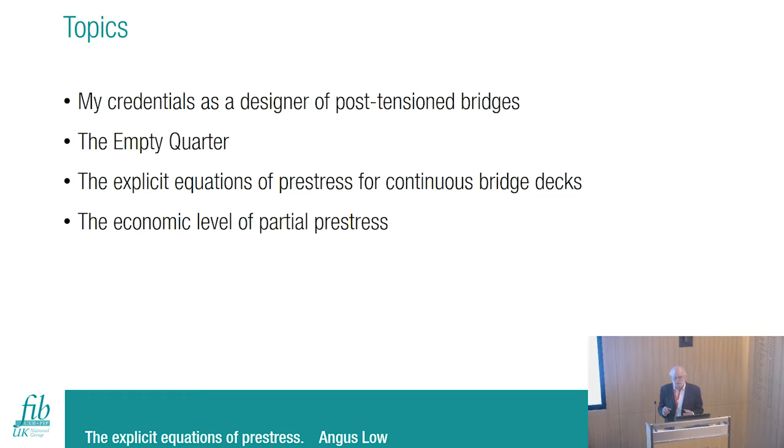The topics I am going to cover: my credentials as a designer of post-tensioned bridges, something I strangely call the empty quarter—an idea which I'll throw at you—and the explicit equations of prestress for continuous bridge decks. This is historic in that I made the intellectual breakthrough about 38 years ago, but it's also right up to date, because I think today is actually the world premiere of it being presented. So that's a world premiere presentation bit of history—try and work out the philosophy of that one. I'd like to get to the economic level of partial prestress, which also comes from an explicit equation, in due course. I think I've got plenty of time.

Do I have to press twice or something, do I?

I said my credentials—I'm a designer, and when it comes to credentials I like to keep my mouth shut. But this bridge is relevant. I joined Arup in 1968. I moved into the bridge group in 1972, when I was sat down next to Robert Benaim, who had recently arrived from the Freyssinet organization in Paris. He was bubbling with everything you can do with prestressing, and it was fantastic working next to Robert Benaim. The first job he gave me was to do the prestressing calculations on this bridge.

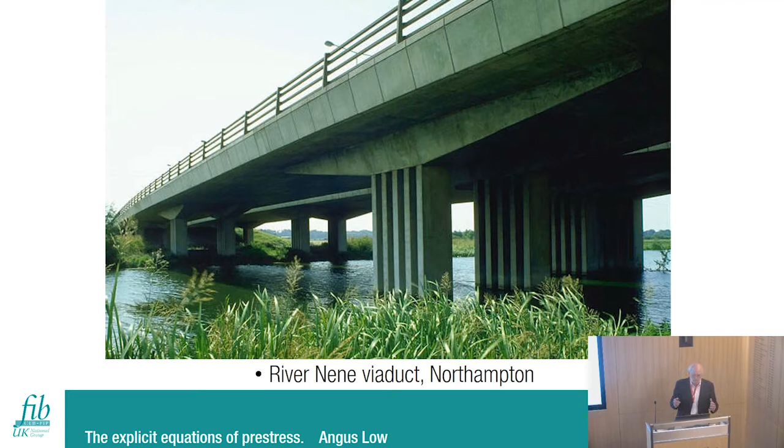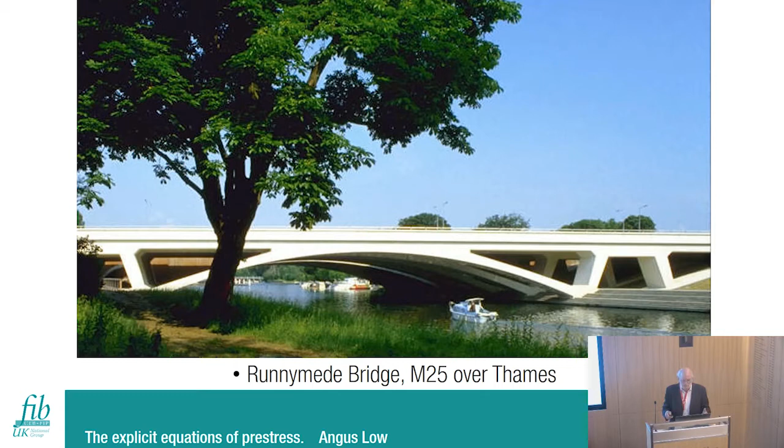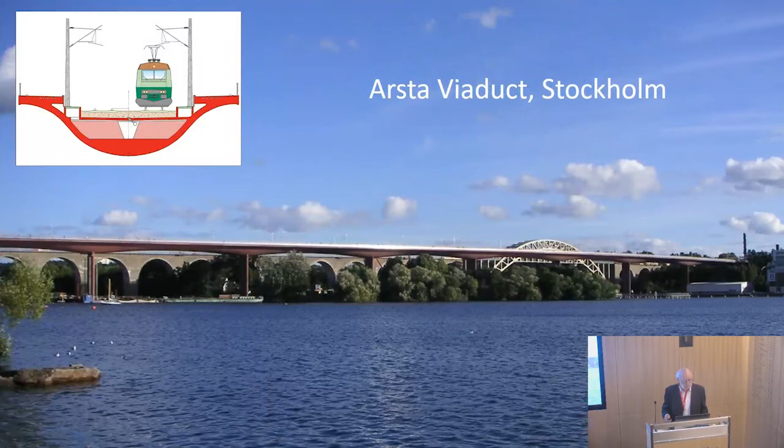In my career, I spent quite a lot of time working in steel and things, which you don't mention at a FIB meeting, but I've actually been privileged to work on many projects. On the earlier ones, I was the person doing the sums; on later ones, I was the person doing the concept. I'm not going to show you very many, but just a general impression—I've had a wonderful time designing wonderful bridges, and that's my credentials.

Which brings me to the empty quarter. This mentions the steel word—this is actually a slide which was part of a presentation I did. Professionally, I've been involved in the fib for many, many years, and I was secretary of the British group of fib for 5 years. For quite a while, I used to go to all the big annual international events.

I've come up with the term 'empty quarter' for a field that interests me, which is design theory. If you go to a big conference that runs over 3 days with 4 different halls, and everyone gets 12 minutes, you get hundreds of papers. If you classified them between theory and practice, and between structural behavior and structural design, that gives you a 4-way split. You'll find that 99% of the papers fit into the blue areas. Then there's this black hole, which is the one that interests me—what I call design theory. I'm quite interested to know why no one else is interested in design theory.

There are a whole lot of faces here who are obviously interested in prestressed concrete. Can I ask by a show of hands, how many of you are academics, in the sense that that's your main income? ...One. Gosh, okay, I hope we might have a better spread. Can I recommend that you get involved with fib? Because a similar question internationally at fib gets about at least a third or a half academic—it's a mix between practice and academia.

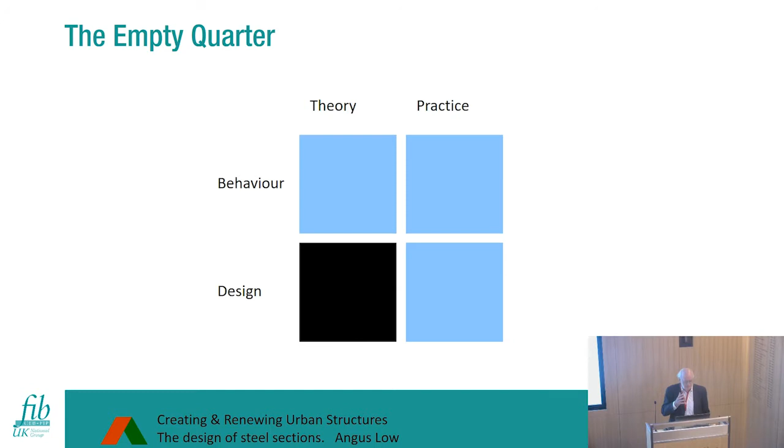Part of the reason for the black hole is that academics are embarrassed by the word 'design,' because that's done by messy practitioners. I mean, why? When we get on to discussions, I'd like people's ideas as to why there is this black hole called design theory. What do I mean by design theory?

Well, to jump forward—these are my explicit equations, mine, though not all of them—the explicit equations of prestress for continuous bridge decks. They're explicit in the sense that the amount of prestress you need is represented where the only algebra is on the left; the right-hand side has no algebra at all. I'm rather pleased with that. They show you how to calculate the amount of prestress you need.

These are simple equations, so the problem has been simplified to an extensive length of continuous spans of pre-stressed concrete viaduct with a uniform section, although actually most of them apply even without a uniform section, but not quite.

So what am I showing? What is P1? P1 is what traditionally Eugène Freyssinet would have referred to as being live load governed, where you have quite a large live load variation that can govern the amount of pre-stress you need in your section. If you think of a pre-stressed concrete section, my criteria, going back to Freyssinet's early days, is quite simply no tension.

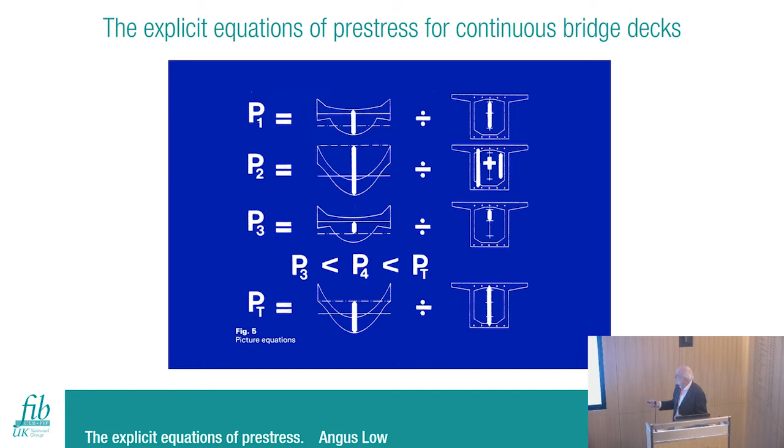Except that has built into it an assumption that when you load up your pre-stressed box, it reaches its limiting tension at the support and at mid-span at the same time, and of course in general it won't. Either the support will go critical first, or the span will. But as designers, we know where the cable has to be at the support, we know where the cable has to be at mid-span, but in the quarter-span regions we've got some freedom. And we use that freedom to generate the balancing parasitic moment that you need to ensure that the support and the mid-span go critical at the same time.

Now, working with Robert Benaim in the early 70s, P1 and P2, we knew that - that was absolutely standard stuff. We were doing design and build, tender bids, and we wanted a very quick way of knowing how much pre-stress we needed. And there was an annoying factor: that balancing parasitic moment.

We knew that there were conditions when we had what we knew as unachievable parasitic. And the only way, when you had unachievable parasitic, there wasn't a simple equation - you then had to just do a very quick, longhand, detailed profile check. Pre-computer, this was all pencil and paper, which was annoying.

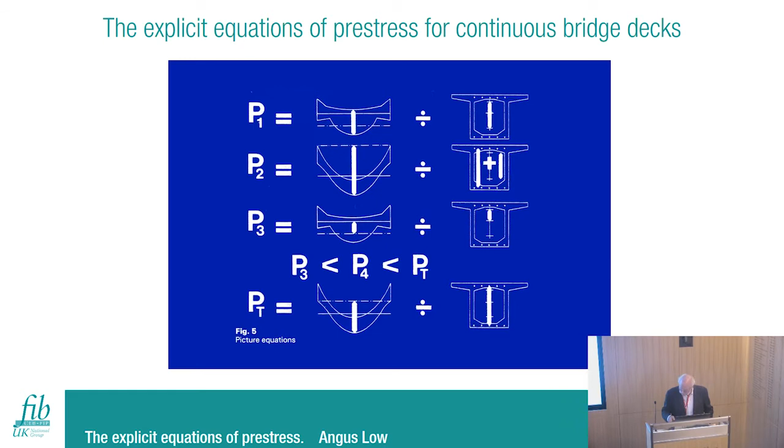Time moved on, and as I got to the end of the 70s, I was pushed onto working in a material called steel, and the delights of steel box girders, Merrison rules and other things.

It's twin rib, and he was getting himself into a real mess, because however much pre-stress he put into it, he couldn't get it to work. He was in a bit of a paddy about it.

I was, of course, meant to be doing my Merrison checks, which it's nice to have an excuse to get onto something else. So from a slight distance, I was actually trying to understand, and I had a blinding flash of breakthrough in understanding what was happening.

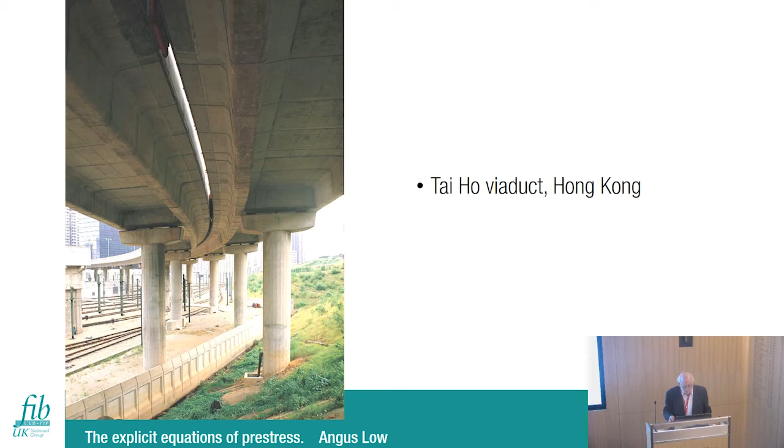Which is what I then called my third equation. So we now come to P3. What I realized, from watching him plotting out the results he was getting—we had computers, but we didn't have computer screens or plots or anything. It was quite crude in those days.

I suddenly realized that when you had a twin rib, so the Z bottom was quite small, that meant that the live load—in the dead load condition, you had to have enough compressive stress at each point along the bottom fibre to cover the live load moment that was going to come at some point in its life.

That meant that every little segment along the bottom fibre had to be shortened by a length based on the live load moment, because there was a stress based on the live moment that was due to come. If the Z bottom was quite small, that stress was quite large.

The total effect of all these stresses all the way along was to shorten the bottom fibre by a certain amount. Because the span is one of many spans, you can't shorten the bottom fibre without shortening the centroid. And that leads directly to this equation, P3, my breakthrough, my third equation.

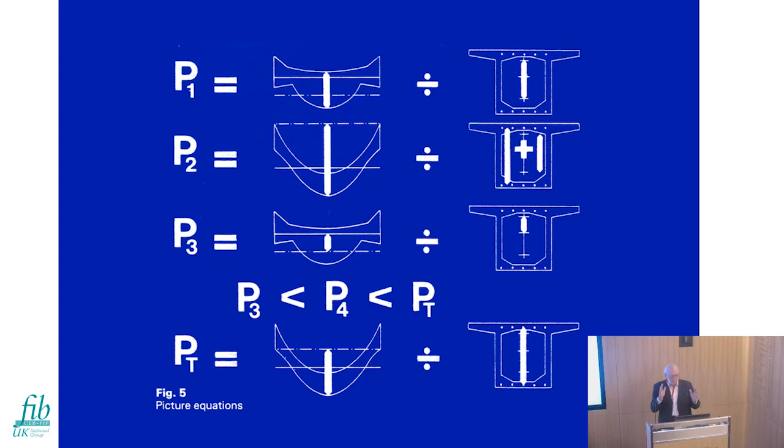P4 makes things a bit tricky in certain circumstances, and there isn't a very clear explicit equation for P4, except it's between P3 and PT, and if you take it halfway in between, you won't be far out. So those are my explicit equations of pre-stress—my picture equations—and I feel quite chuffed with the fact that you have equations without algebra.

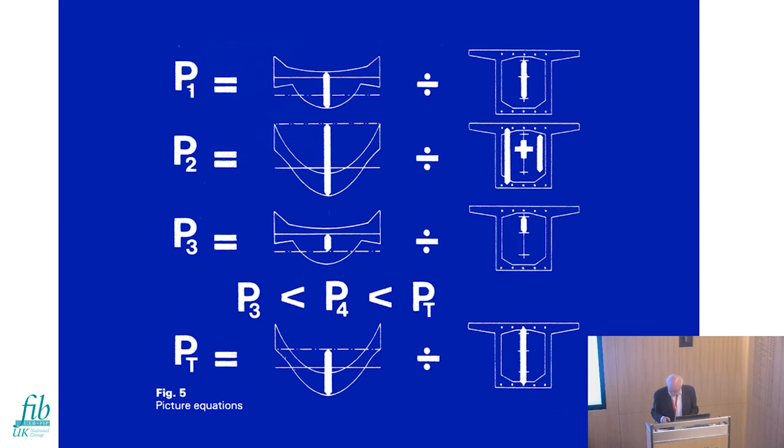So I published my third equation as the preliminary design of pre-stressed concrete viaducts in the Civils proceedings, June 1982. My colleagues were somewhat baffled by it, and I was a bit pissed off because I didn't think it was that complicated.

But anyway, I then had another breakthrough, and my second breakthrough was the picture equations. Now, the picture equations haven't actually been published. I thought it would be nice to publish them in the FIP, as it used to be. But I hit a snag there, which it's taken me 30-something years to overcome to get me here tonight. I thought it would be nice to present at the annual event of FIP, so I sent off my abstract. But it turns out that FIP prescribes in advance the topics which are going to be discussed in any one year.

How the hell do they know who's going to make which breakthroughs in any one year? It is so bloody arrogant and crass that they should do that. If FIP/FIB is a learning society, then it must have an open session each year where people who've made a breakthrough can make their presentations. You shouldn't be limited to whatever someone thought was the topic of the year.

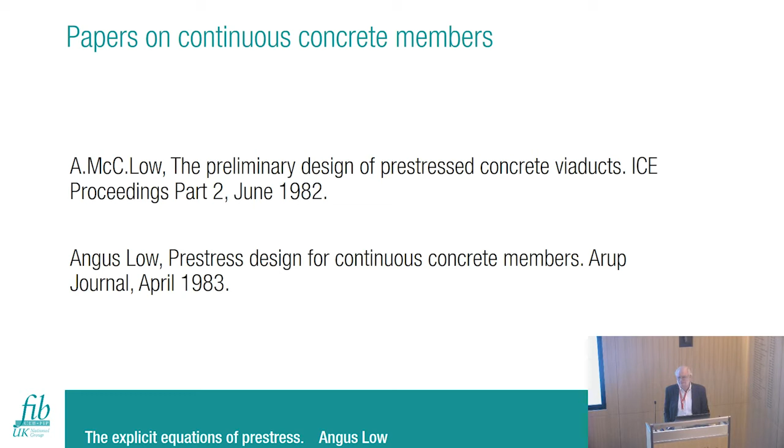Otherwise, for 3 or 4 years, I just submitted each year and I just picked up all the rejection slips and then I got bored. And I've waited till tonight to overcome my anger. And aren't you lucky you're here to receive it?

Okay, so why are explicit equations important? Well, the point is, once you've got an explicit equation, you can do things, you can actually differentiate it. I just throw in that this is a figure from my Civils paper, and it shows that I rather liked, on the right-hand side, dP3dA. That is the calculus of shape.

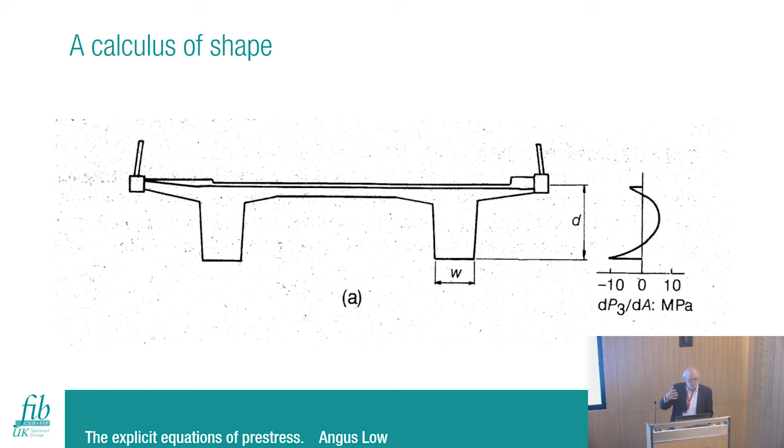That shows you that if you add a unit lump of area at each level up the section, it shows you where it reduces the amount of pre-stress you need and where it increases the amount of pre-stress you need. It's a small step to turn that dP3 into a cost function. Once you've got explicit equations, you can put them in spreadsheets, you can juggle things, you can learn a lot.

What I really want to talk about this evening is a paper on partial pre-stressing. And this is something, really, it was me trying to get to grips reading the Eurocode, and trying to see how Eurocodes were going to change bridge design.

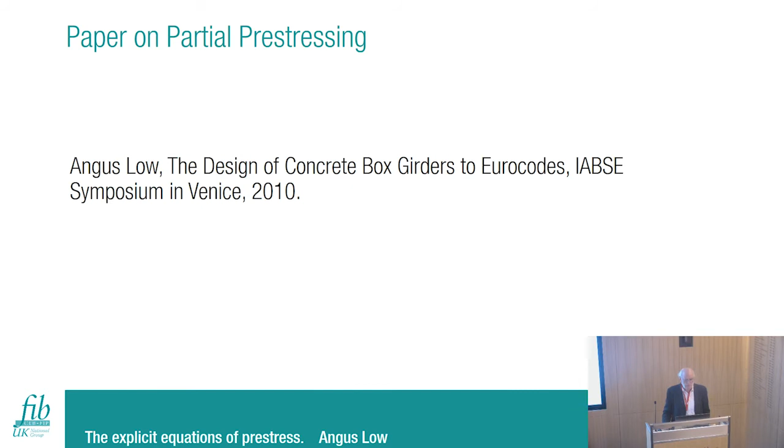So the title doesn't include the word partial pre-stressing. It says the design of concrete box girders to Eurocodes. And the significant point is that the Eurocode allows any level of partial pre-stressing, but only with external pre-stress. So which level is most economic? I'm not sure that anyone else has addressed that.

Many designers have felt more comfortable continuing to use internal pre-stress, although they choose to ignore the clause which requires decompression to be checked in all directions. They fail to apply transverse pre-stress.

I'm a bit out of touch. I've been retired for many years now. But I suspect that people have a habit of not reading when new rules come out, because they know the old ones were perfectly good anyway.

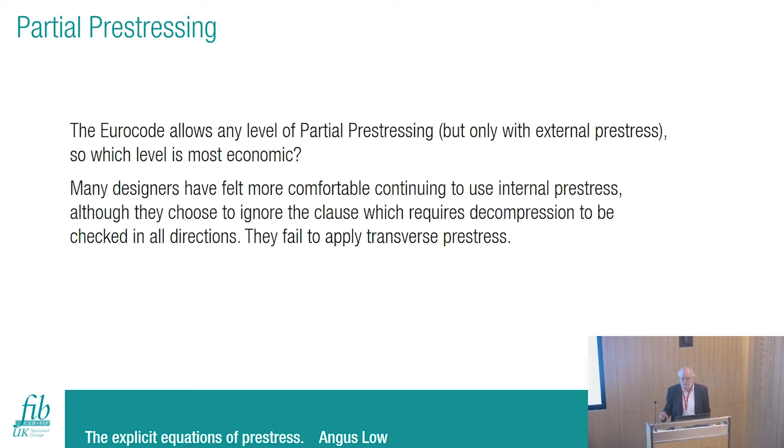So my little breakthrough here was the moment stress plot. As a designer, it's absolutely crucial how you display data. In fact, a large part of, if we managed to fill the empty quarter, it would be filled with papers that showed good ways of displaying data in a way which makes the design obvious.

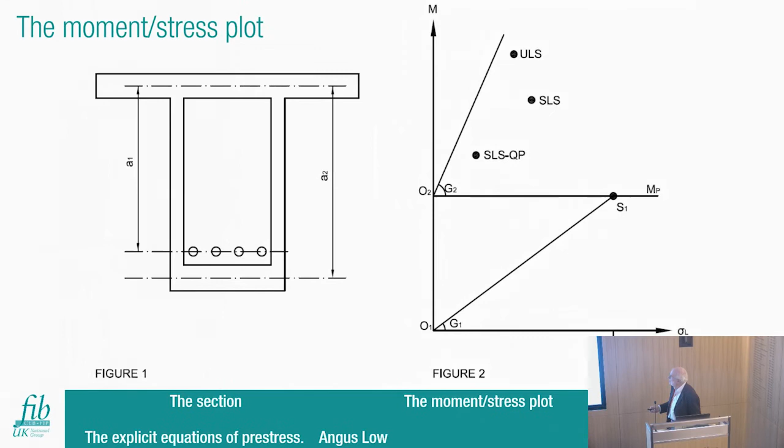Yes, all right, good. So that shows you that G1 is the A1, the area of the pre-stressing steel, times the lever arm.

The point of this is, it's not a big point, but that you don't have quite the same lever arm with the box girder. I've gone for a box girder because I'm cheating, to make life easy, I'm assuming that the lever arms stay constant, so I'm ignoring the web width, just to make life easy for myself.

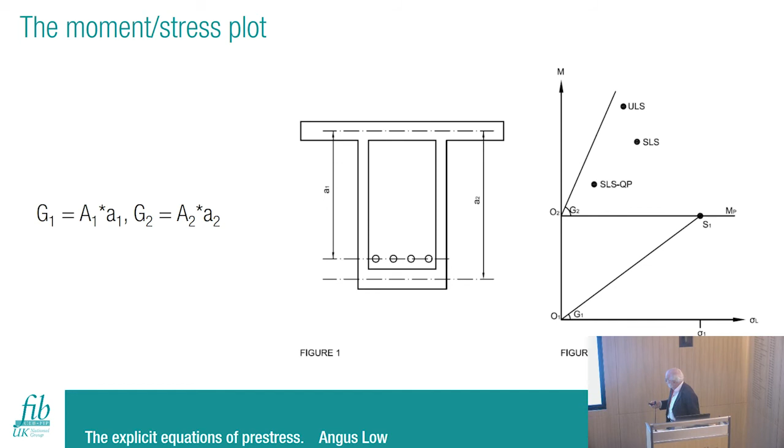Okay, so to get some feel for what is the optimum, you do the obvious thing. You change the amount of pre-stress moment, and then I come up with the total cost of reinforcement and pre-stressing per meter of deck, increased by that expression.

This will be positive if sigma L, which I am just considering as a notional limit state, is that stress limit for the limit state. So I then land up with these figures, this expression, sigma L is, as you see there.

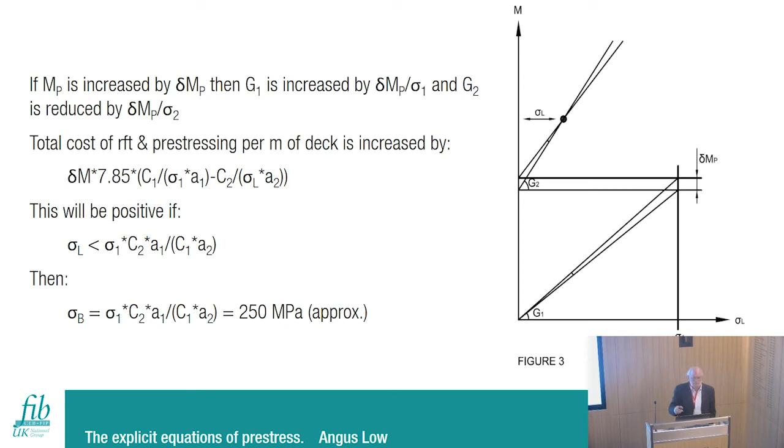This will be positive if sigma L is less than that expression. If you set sigma L to that expression, that then becomes the balanced value of sigma L, which I call sigma B. Sigma B has that expression which, throwing in some rough typical values, gets me somewhere around 250 megapascals.

Now this is the little game that I apply. Having identified that sigma B is at 250 megapascals, it then becomes the vertical red line.

I then imagine that the blue line is a stick which is being brought down from above, and where it hits the red line, I'm trying to get it as low as possible. But it can't go past any of the limit state points.

So you see that it automatically selects the ULS and the QP points as being the ones that govern it.

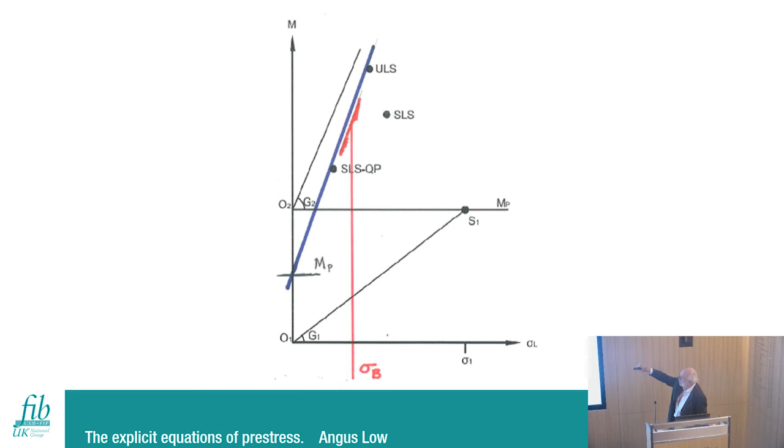So that bit of algebra is simply just saying that you've got a straight line going from the ULS to the QP point, and where it hits the axis, that's the algebra. It's just saying that, and so that is the MPE, meaning the economic value of the pre-stress moment.

If I divide by A1, I get PE. It's just that I've given you P1, P2, P3, and P4. So I've given you here your fifth explicit equation. You get your value for money.

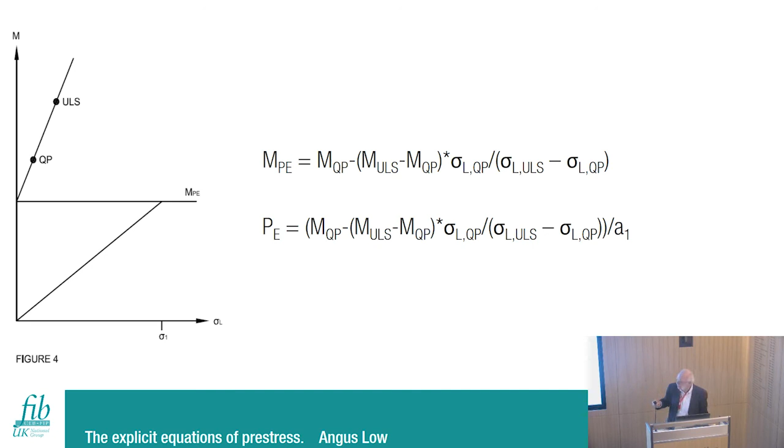And then, with typical parameters, PE is negative, indicating reinforced concrete. Now that was a surprise. I thought we were talking about partial pre-stressing.

This happens when the live load dead load ratio exceeds 0.41. Even if this ratio is not exceeded, the quantity of pre-stress will be small, which will raise the unit cost, and again RC will be the economic solution.

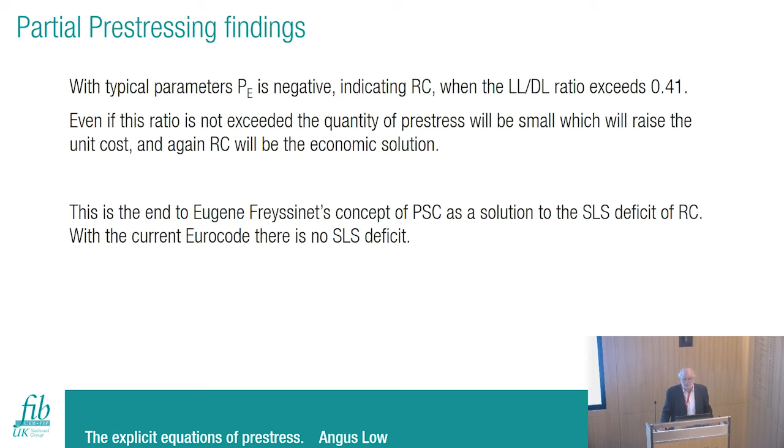This is the end to Eugene Freyssinet's concept of pre-stressed concrete as a solution to the SLS deficit of RC. With the current Eurocode, there is no SLS deficit. I think that's a mistake. So, goodbye pre-stressed concrete? Well, we'll come to that.

I mean, this makes me uncomfortable. I do not believe that a design and build contractor should be building repeating 45-metre precast spans for a railway viaduct in reinforced concrete. Either my argument has a flaw in it, or the code is wrong, and I'm pretty sure it's the code that's wrong.

I'm told the French national annex is more likely to result in a positive PE. I think this is the way to go. Just a bit of historic context.

The Eurocodes were launched in 2010, as I remember. That doesn't mean to say that they were written then. These significant parts of the Eurocode were written in the 1980s.

Now, as I told you, in the 1970s, I and everyone else was busy churning out pre-stressed concrete bridges. And then the pendulum started to swing to steel. The steel fabricators invested in numerical control, and suddenly the prices went shooting downwards, and concrete couldn't compete.

The people writing the rules we're using today were writing them in the early 80s, and they were really smarting from the way that the steel people had stolen their thunder. So I think they overstretched themselves in relaxing the SLS requirements, and I don't think they should have done.